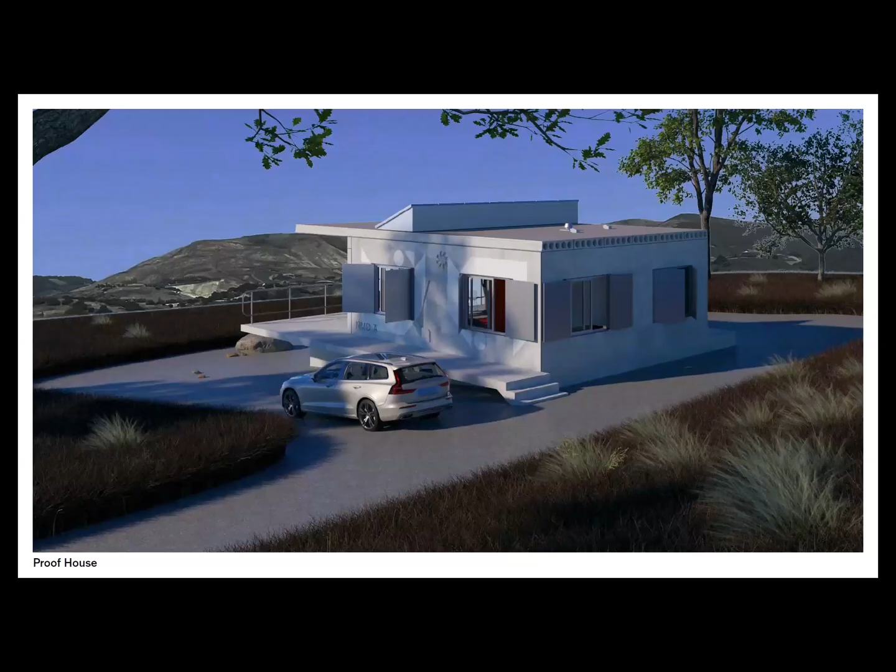There's the view—amazing view. It's a somewhat inhospitable site that has to be remade and rebuilt or cleared for the most part when we take the project on. The project I'll show you is the third scheme, and I'll show you an image of the first couple of schemes. It tells the story of this design relative to change, both internal change for me—not paradigmatically, but just in this one project—from X to Y.

A lot of this, of course, had to do with the conditions of not only the environmental response, but also conditions like money, budgets, timeframes, and that sort of thing. It's a concrete house, a precast concrete house. It's a very, very simple volume, and what you see is what you get in many ways.

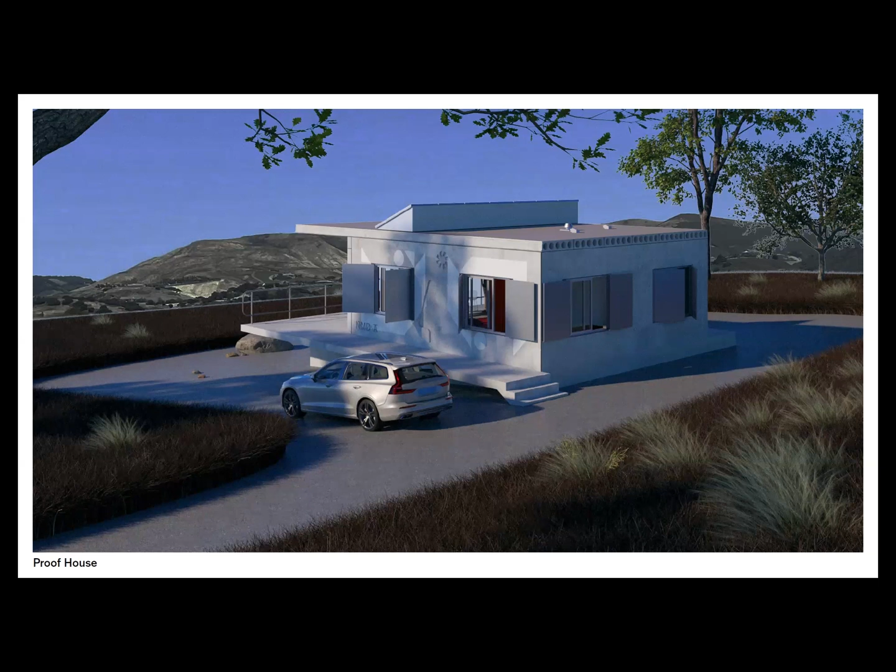There's a plan—we don't have a laser pointer, but it's nominally 24 feet square. It's slightly off square. You can see the dotted lines that go over the plan; those are 4 foot wide by 35 foot long precast concrete hollow core deck elements, which I didn't design. They're based on a factory element that gives you a scale of the project. So it's about a 10-foot cantilever on this roof.

Each one of the walls is an independent precast form with punched windows in it that are all the same. The project as a building is very, very much a response to finally discussions, even after a couple of years, of why do this project? We want to have a lifestyle that would engage in this. We have a certain amount of luxury to be able to do that. The conversation about doing this—because they're not so wealthy that they could buy a site on the coast and build a fancy house—in some ways speaks to California's question of wealth and status. They're certainly well-to-do, but not absurdly or obscenely so, shall we say.

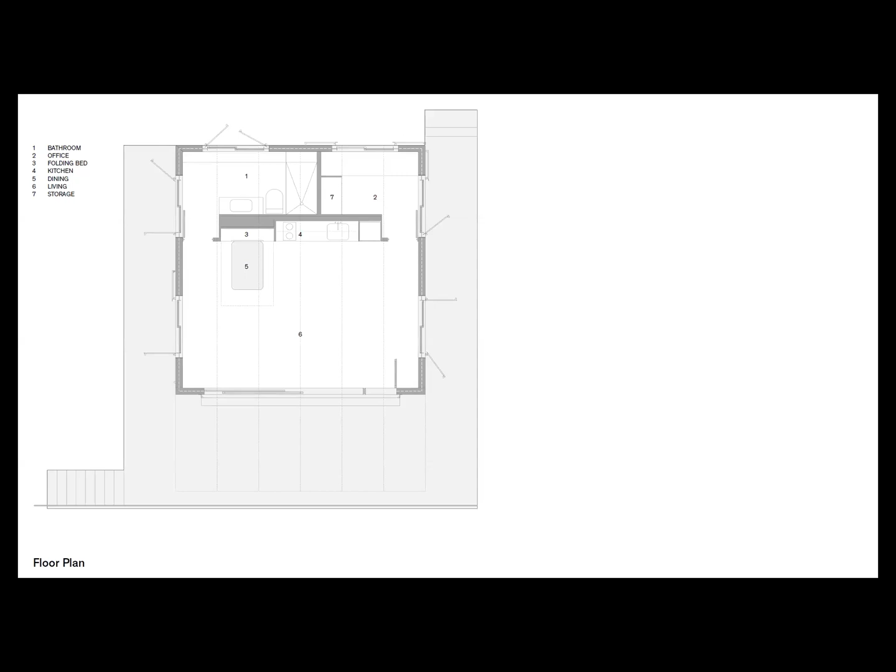Number 3 is the folding bed, so it's a Murphy bed. They fold up the dining table into it—a standard micro loft design element. The rest is just a space for them to hang out in, and the terrace around is for viewing, etc. You can also see the steel shutters on the windows.

Now, if I compare that project to this one—ooh, this one's cooler. Much cooler looking, more like me. If you examine the past 20 years of my work, you'd say, these are his colors, these are manipulations of his forms. And that one is not.

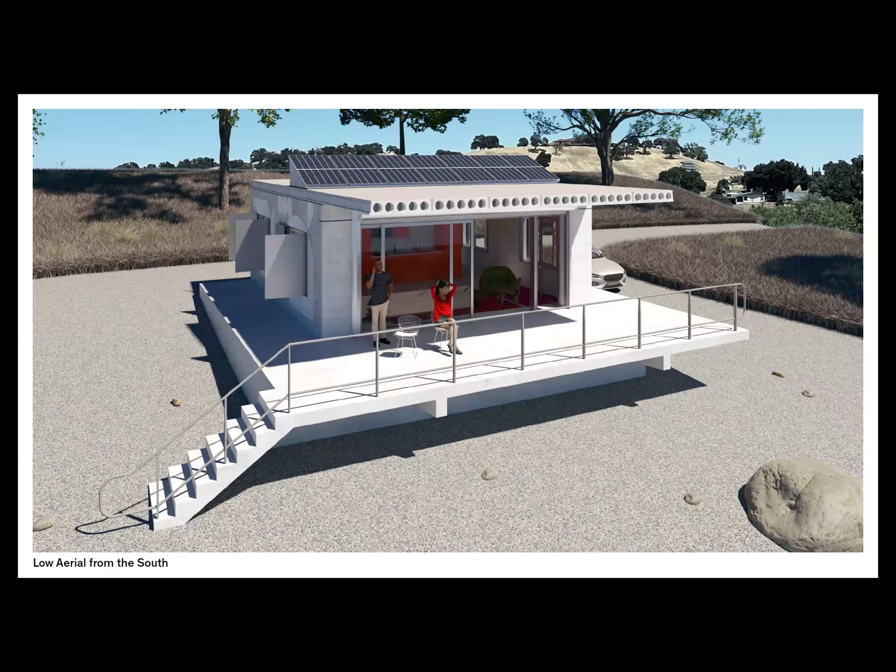Who did that? I don't know who did that. Now, I'm still of the generation where it matters who did what. That's either boomer ego or boomer ambition, or I haven't quite gotten to the part of selflessness.

But it's interesting—this one is a transition moment where I wanted a certain amount of exoticness in the precast system. It's an octagonal house. Doesn't really work as well.

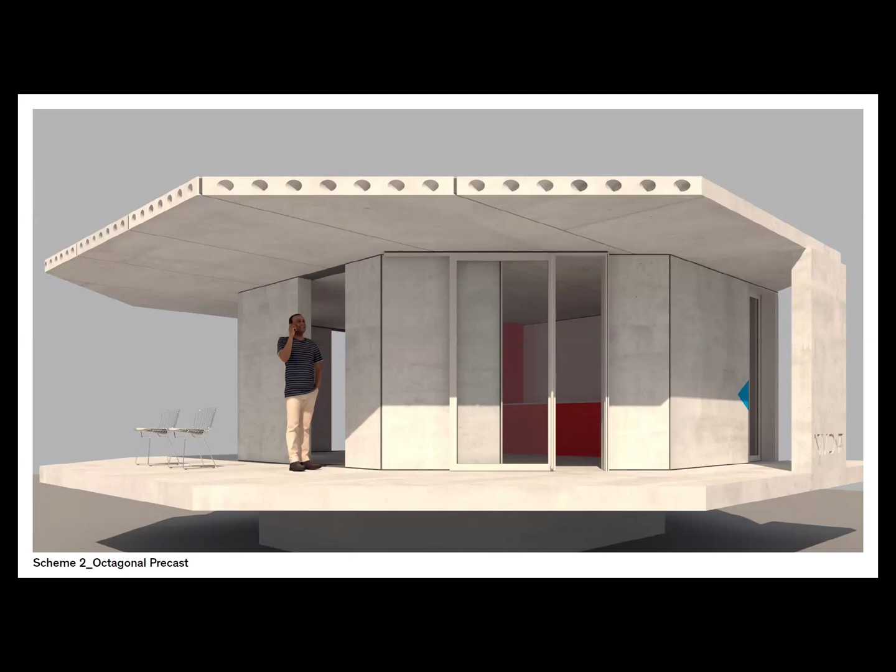Essentially, at the end, we transitioned from the first scheme into the proof house scheme, making it in precast concrete for fireproof capabilities. This became the ultimate and direct expression because it is affordable for them. It also speaks to the logic of construction that we want on the site, which is as little as possible.

So it is what you see is what you get, except that when you look at the elevations, these are just regular aluminum sliding windows, reasonably good size. These are silver painted steel shutters, because the burglar-proofing is: shut it, lock it, put the rolling door down, and walk away from it. It's coyote-proof, burglar-proof, et cetera.

And because they don't Airbnb it, you open them up. Along with the super graphics, which I'm responsible for, as well as the way in which shadows produce graphic design—that's why I love renderings like this that engage in shadow. There's an ideology about shadows in drawings.

I don't want them, or I want to diffuse them. I want to design with shadows. I want to paint with shadows, because A, they're real, but they're also incredibly vital.

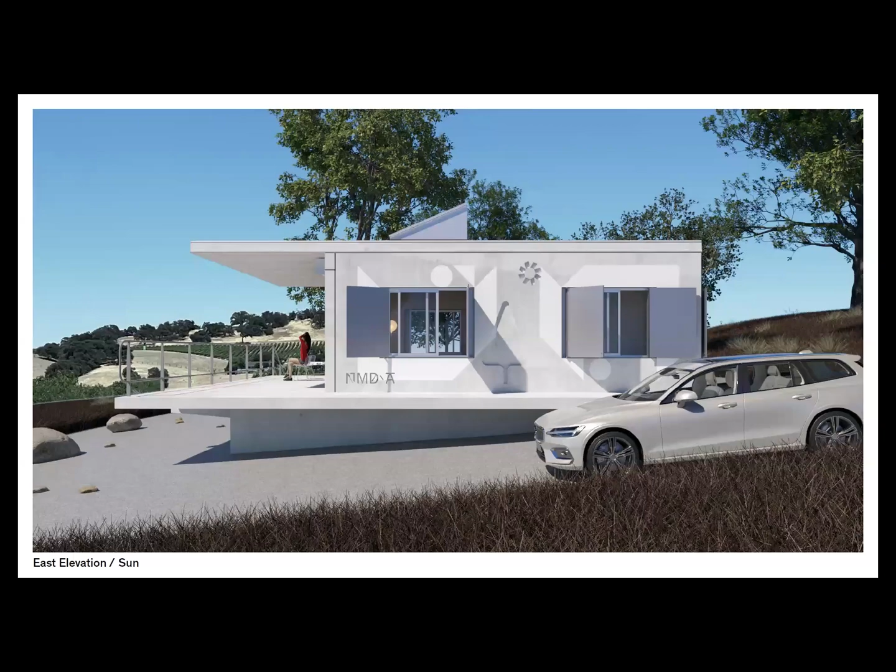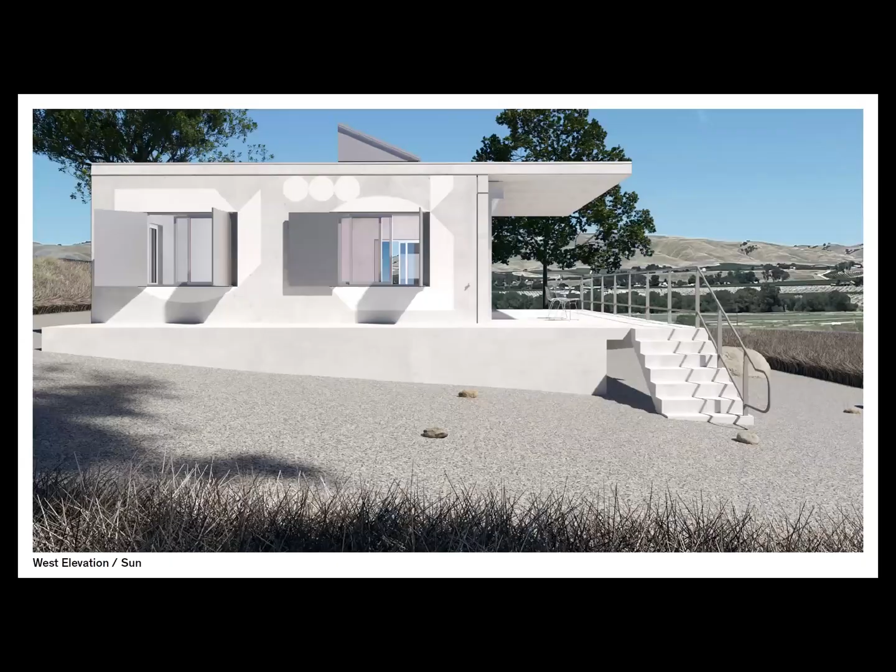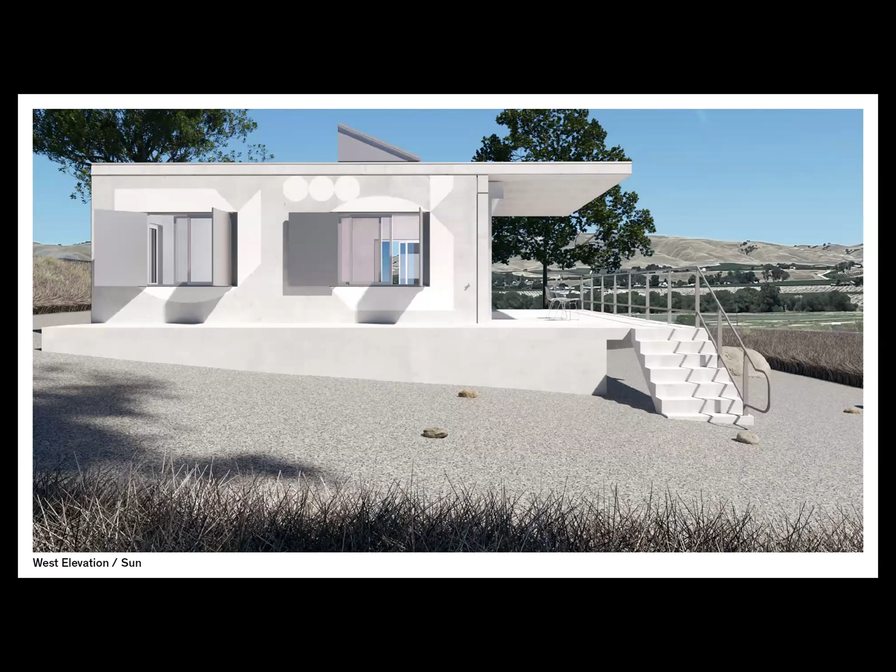There's not really much else to say, except that it's probably the highest level of engineering that needs to go into this, and also the resolution of all the components of making it resilient essentially gives it the design. Now, I've tweaked the way the shutters connect to the windows, and there are small details in there—of course the graphic design, et cetera—that bring a smaller, finer thumbprint into the project.

The other thing about renderings that I like to do is try to simulate as much of the real conditions that a building will enter into. That means having some skill at the rendering level. And the fog—maybe you've even seen it roll in in the morning—makes us ask questions about how the color qualities, contrast, et cetera, change in these different conditions.

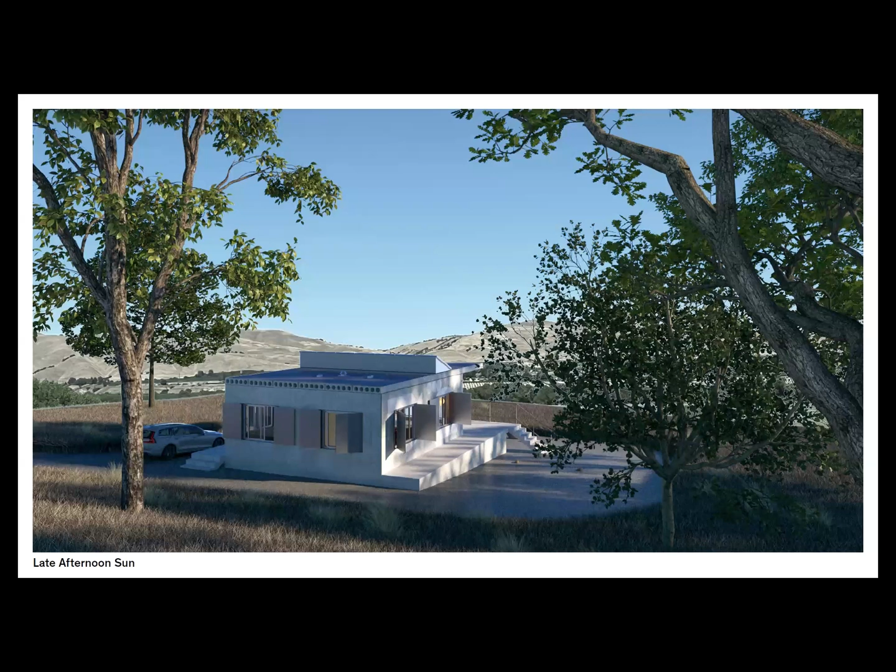Here you see that column is a cast-in-place column. Then it's a precast beam, not in sequence. There's one of the precast walls. The windows are brought in separately after they're on site.

And you can see the overhead door. You can pull that down, shut the shutters, lock it up, and walk away as if it was a kind of storage box.

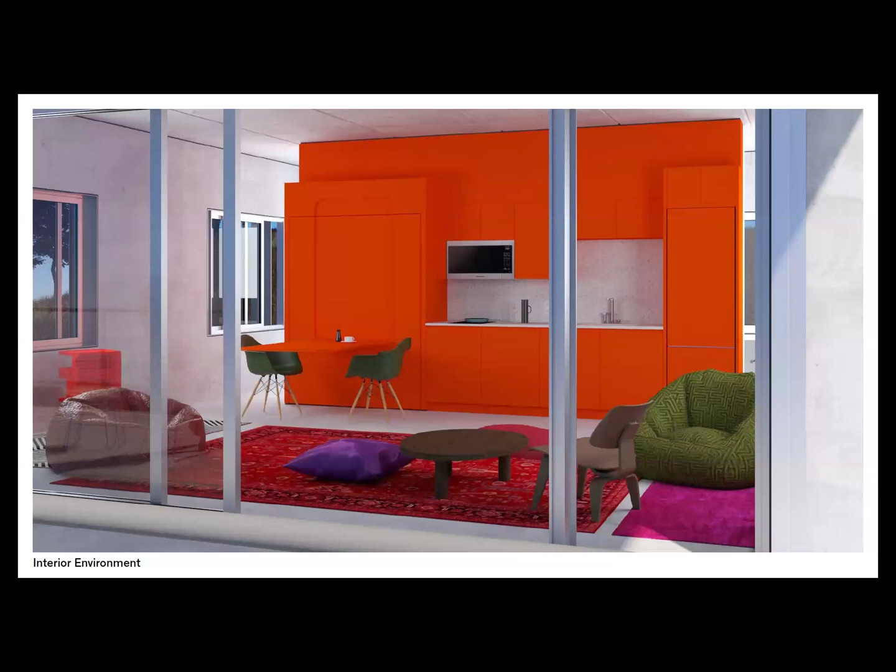Inside, it's a pretty Spartan environment, except we want to have a certain amount of vitality and color. This is a repeat client for me, and we've shared a lot of the same aesthetic values and agendas, which makes this quite fun. And the view outside.

Okay, this is the most recent completed project that my office has done. It was finished about six months ago. It's in Beverly Hills. It's a 30,000 square foot spec office building. A spec office building is a piece of real estate. A client comes to you and says, let's develop a site. You have the program, the budget, the zoning envelope, and a spec office building is you build the floor plate and then you seek out tenants. It's part of the economic machine.

The not-so-dirty secret is developers build cities, not artists, not politicians. There's only one stadium, there's only one city hall, there are only a few libraries. There are millions of office buildings, there are millions of housing projects, and they're all in our capitalist system based on return. I've engaged in that for a long time because I said I'd like to help build the city rather than sit on the sidelines and wait for singular sublime commissions. It's been both rewarding and challenging at the same time.

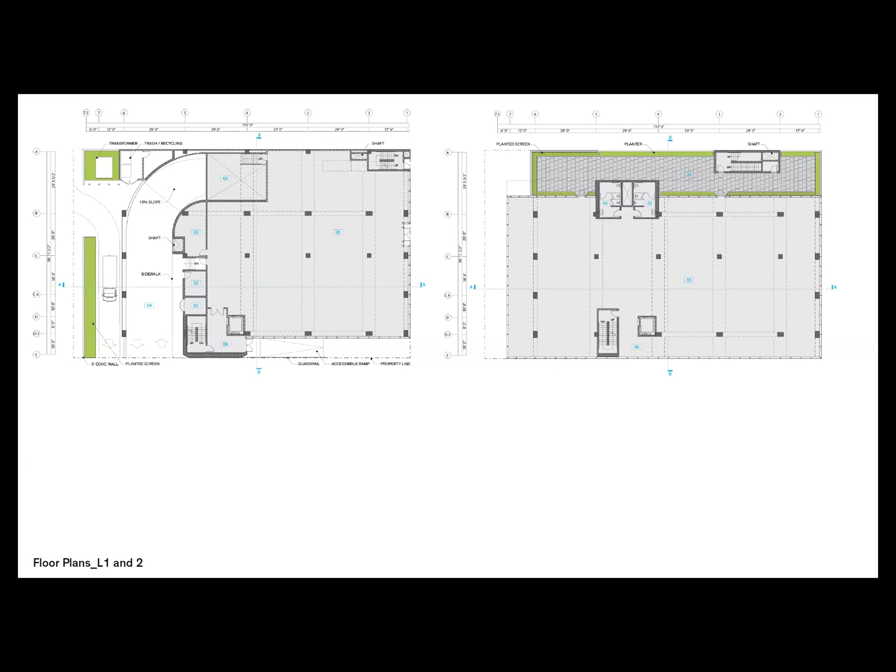There's access to the parking in the back off the side street. The lobby is incredibly minimal. All it is, is 2 stairs and a toilet core, and otherwise it's just an open piece of real estate.

Now, with an incredibly wide lens, we can make this kind of image. And you can see at some level, though I've painted the picture of it being an empty programmatic project, there's still something projected at a level of sensibility, at a level of impression.

In fact, if you do a building in the city, unlike an Atascadero, it's a public building. It's a public building to the extent that the public interfaces with it, even if you don't enter into it, even if you don't have business there, even if you don't own it.

These are some details. So the image on the left gives you a little bit of an example, actually both images, of what's going on. There's a 6-story storage building next door, and my job was to try to liberate, to move as much of the floor area of the building as possible away from the party wall, because obviously there's no light coming in to that point.

We are on a corner, there are 3 facades that are open, and so through some magic of shifting the area around, because we have a box that we have to work within, a zoning envelope, shifting it around so that we can get 10-foot cantilevers on the one hand and a 10-foot soffit for the entrance to be able to liberate the top 3 floors of the building away from the building next door.

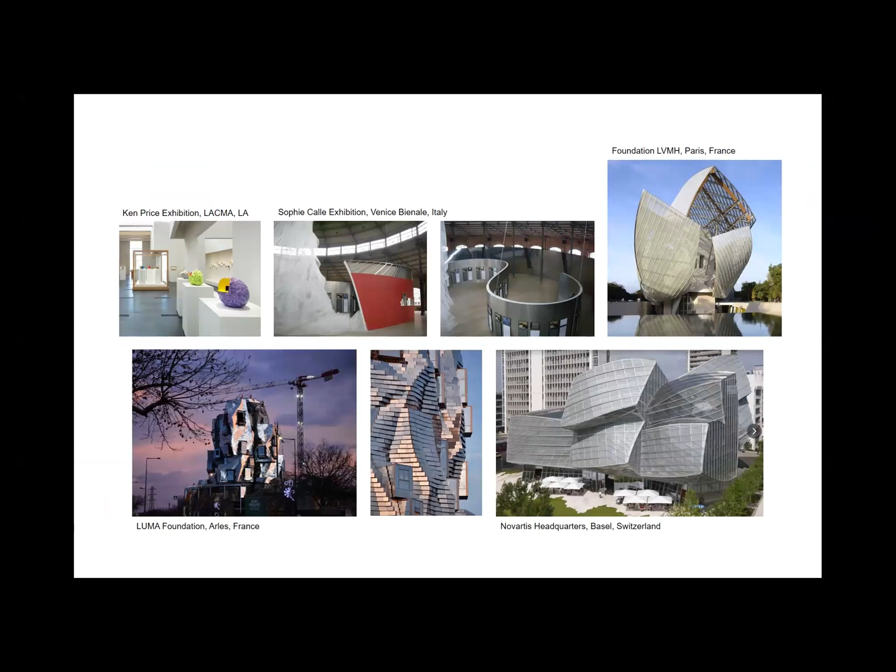I started the office back in 2012 after a stint of 8.5, almost 9 years working at Frank Gehry Partners. While the practice represents my own unique perspective and the perspective of the team working on the practice with me, I've certainly brought lots of interests, curiosities, experiences, and expertise from previous professional experiences and interests cultivated on my own.

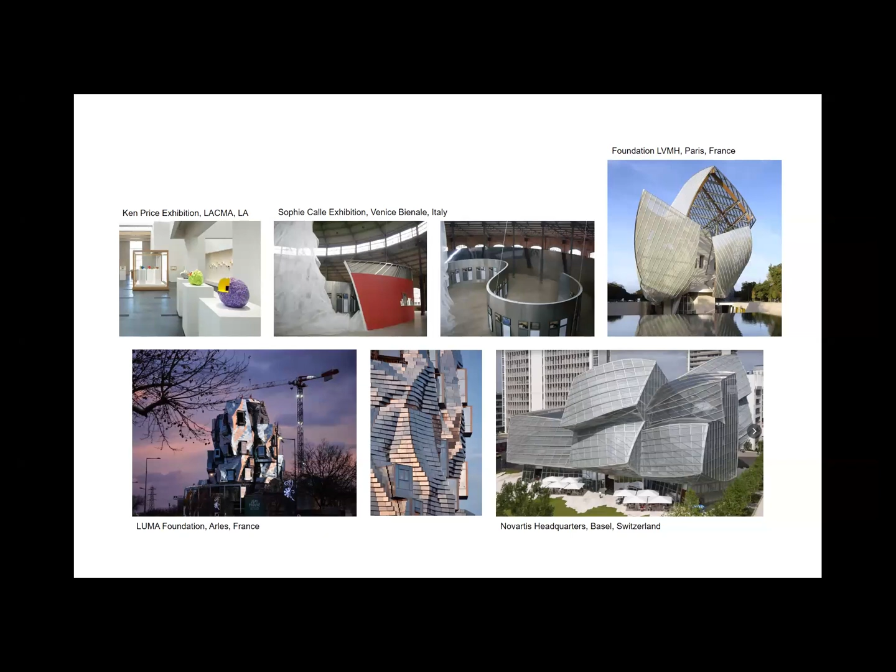These images are referencing the work I contributed to at Frank Gehry Partners. These projects are never explicitly referenced in the final output of the work we produce at MN Office, but they often serve as touchstones and day-to-day fellow travelers. We look back at them to make sense of some of the work we do.

I think that's important to acknowledge, because we often think design interventions come out of thin air, and sometimes they do. But in my experience practicing and observing others I admire, that's not typically the case. There are often threads that reemerge or are cultivated at different instances of a professional life throughout different opportunities.

I wanted to put this out there as background to what I'll be talking about. I also have to acknowledge the work of artists and art movements, which are impactful for me. I think they're different things for different people—some delve into histories or sciences or other influential lines of thinking, philosophy, as Neil was mentioning.

These practices and works have been a long-time influence on me and on how we've been thinking about the work. I hope to tie that into some of the things I'll show. The names of these artists are loosely grouped together as the Light and Space movement, which developed here in Southern California. That's an important thing for me.

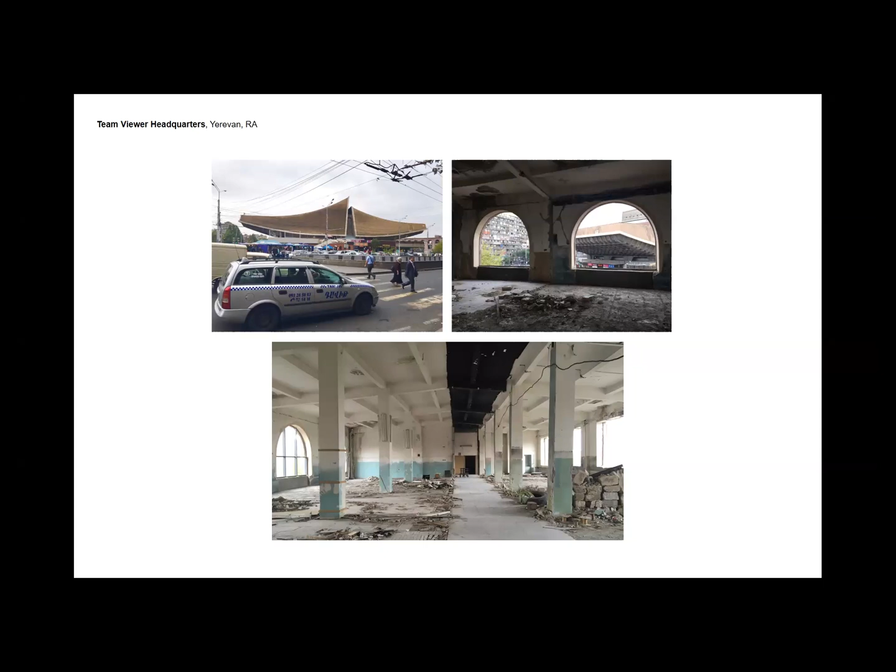The first project I wanted to share, realized quite a few years ago, but a good one to thread the past and what came after, was the headquarters for TeamViewer in Yerevan, Armenia—an institutional commission. It was located in a largely idle Soviet-era factory in the heart of Yerevan. Although very dilapidated, this building was designated as a historical monument, and was a full-on fabrication factory before the Soviet Union fell.

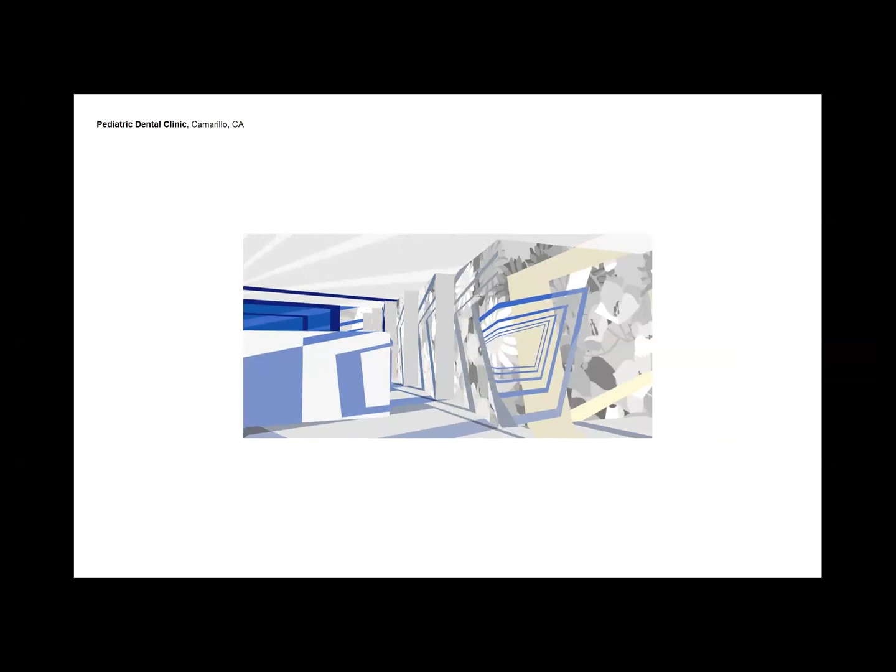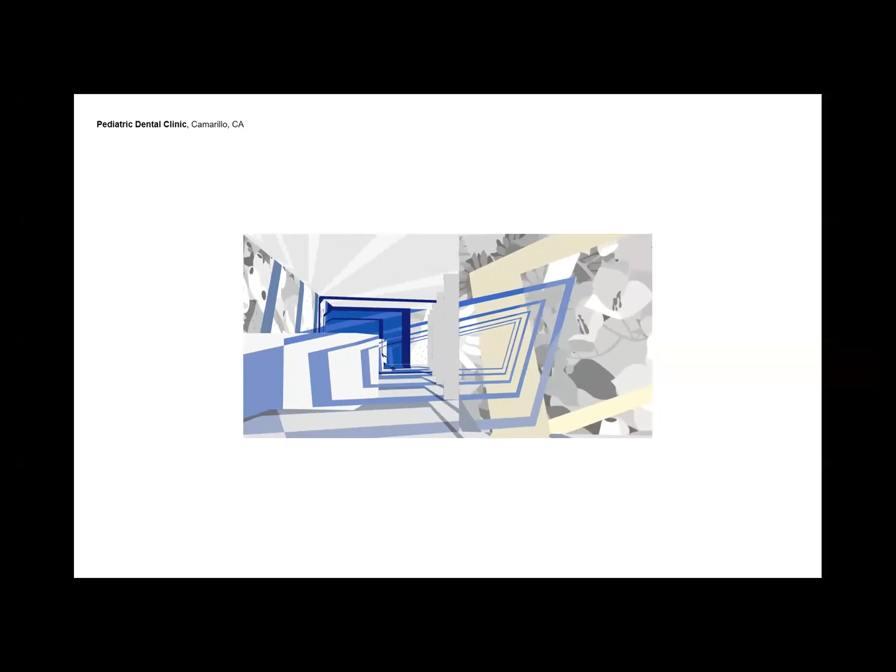Again, with the videos we're trying to simulate how we would make all the layers we're designing—the illustrated graphic, the various layers of vinyl, flooring, carpet, lighting, wall build out—all snap into focus by animating these 3D moments. It uses anamorphic projections as well as illustration upon a series of lenticular surfaces, the step surfaces, to create layers of visual interest to engage with, and for key programmatic functions to organize themselves through.

Jumping back to a project we did a number of years before this, it was a proposal for a gateway in Little Armenia. We were invited to do this proposal. It was a finalist; we did not get it. You will not see this proposal built. You'll not see this as a gateway.

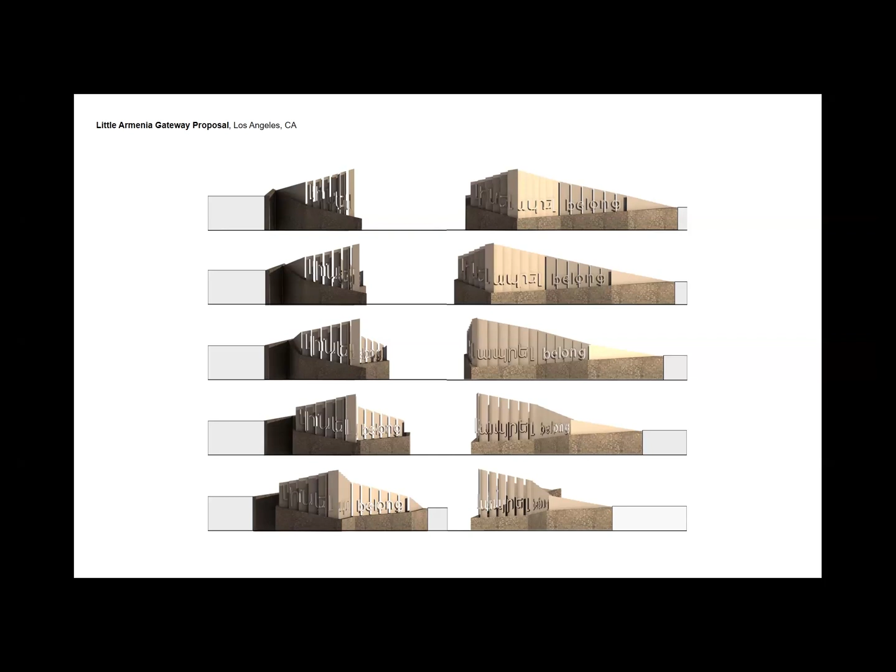But this project, I think, was the first time we started working with a lenticular surface, and that theme reemerges and scales and skews quite a bit in our work. A lenticular surface can be a way to control an optical illusion or optical perception when done in photography or image production, but at the scale of architecture or environments, it can also start to shape what one sees and experiences, or time when one sees and experiences said environments.

So back to Sugarbug, the dental clinic. I think the efficacy of that lenticular surface in handling all the programmatic complexities of the project was one of the key threads for us to jump ahead on. We actually started thickening it and programming it, filling it in with some of the operations bays and dental visitation bays.

As you see in this diptych, the geometry of the irregular stripes took cues from the ships in World War I that were camouflaged in order to make their distance not easily visible to the enemy. So we started taking the stripes and camouflaging the space, so that once you're walking in the main area, the distance between an operatory bay and where the public gets to walk becomes obfuscated through the graphic.

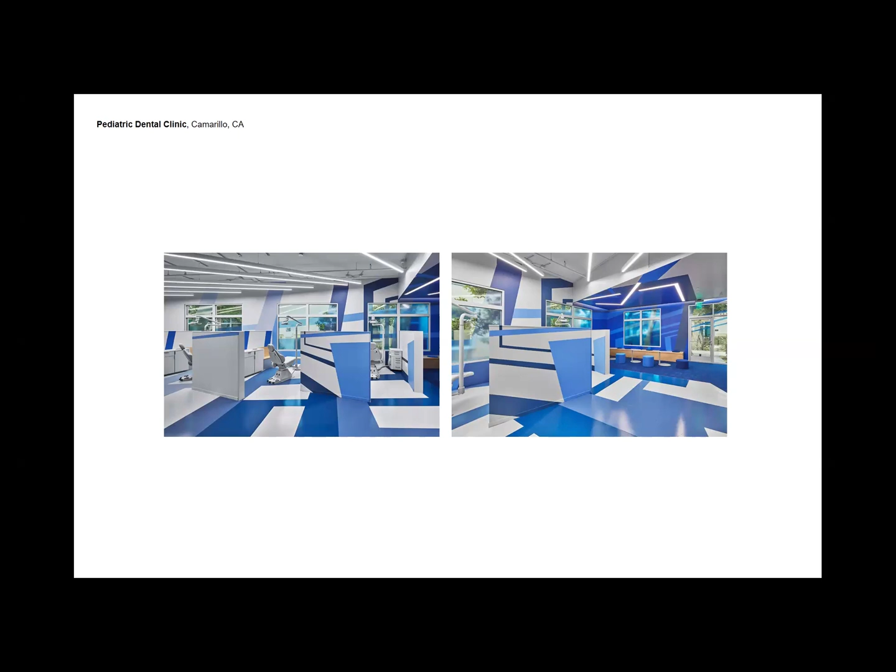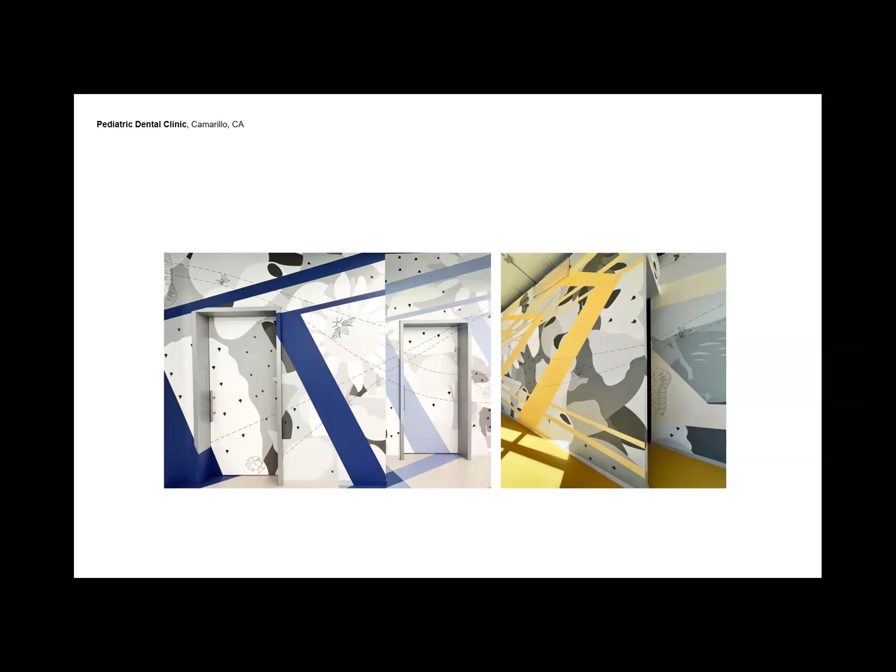The illustrated layers of the local flora and fauna brought the project back into the time and place, against these more abstract lines that were doing the work of certain spatial configurations. The colors and tones were programmatic wayfinding indicators, as well as a kind of brand identity starting to emerge for this particular business.

We make really intense drawings that project all of this work back into them, because the drawings, like a Sol LeWitt who made his artworks through direction, become the kind of direction for how these things get installed through various trades.

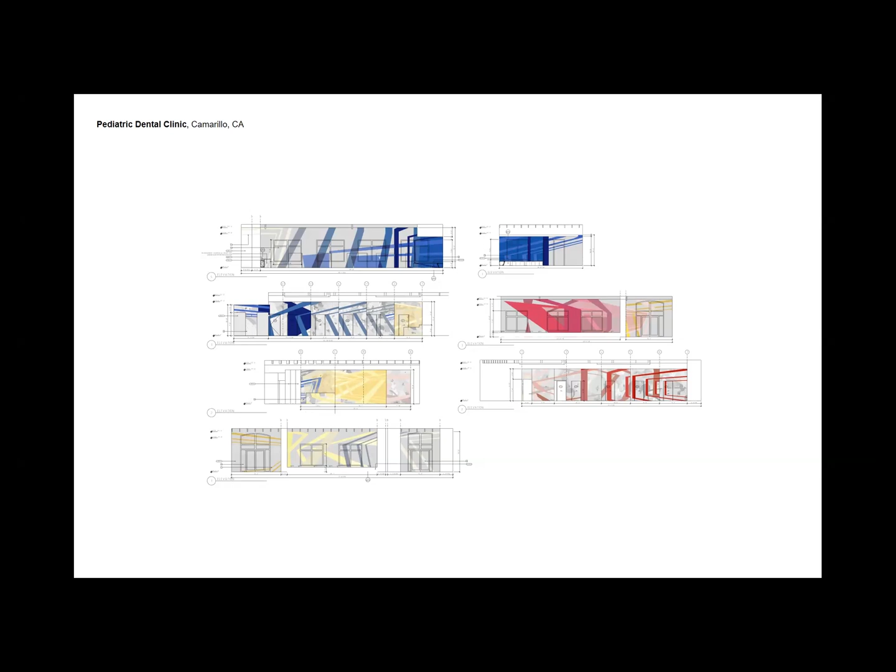So these are some examples of that—the model becomes the lead in designing and communicating, but then that digital model also flattens into drawings that become construction directions.

So the project intention culminates as formal operations that, when commingled, transposed, and translated, have the unique potential to transform a spatial condition that would otherwise be hermetic and potentially not so inviting to its younger constituents.

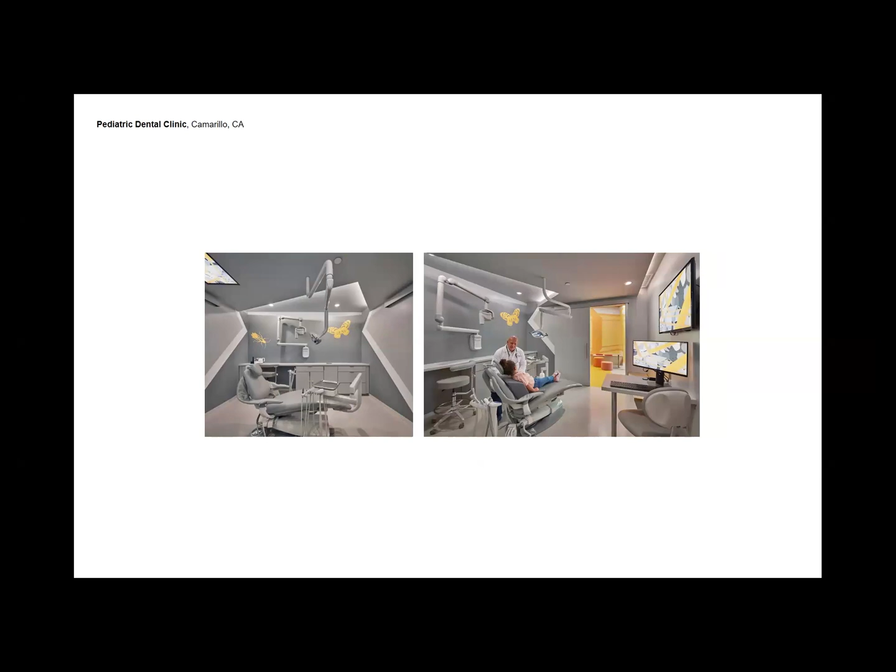And these are the interior spaces which start to differ as an internal environment than that exterior, much more exuberant zone.

Jumping to a current project we're working on, very much in process—our proposal for this adaptive reuse of a neoclassical building in Yerevan. This project takes the work we've been doing with imagery, graphic, and projection.

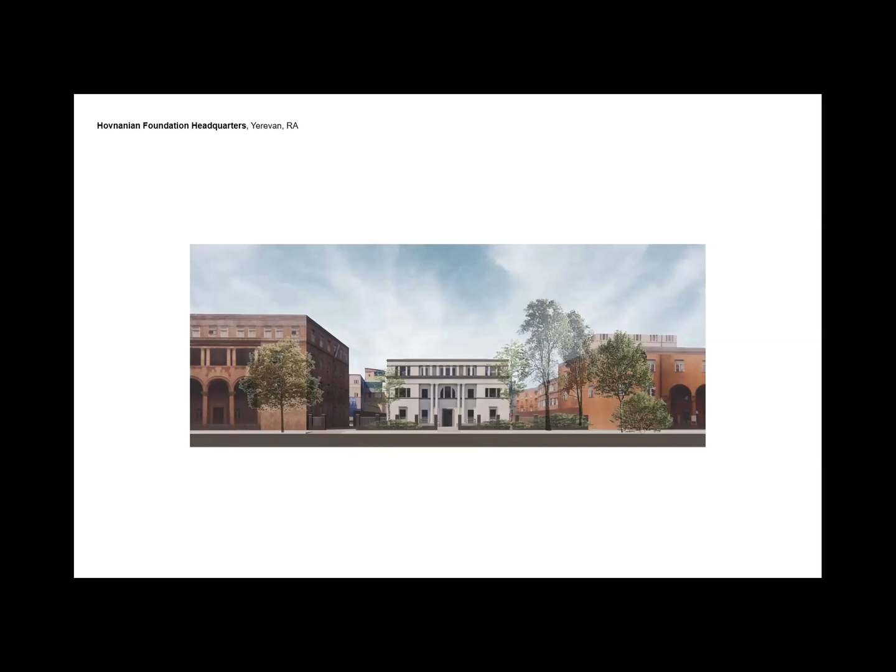And brings that work we've contained into an interior environment to contend with a very overt exterior environment, with lots of historic monuments around and very keen opinions on what should and should not get built. So the perception of the existing needed to be recreated and reimagined.

After decades of anachronistic alterations, while stretching the imagination of what might be, toward a kind of holistic, singular reading.

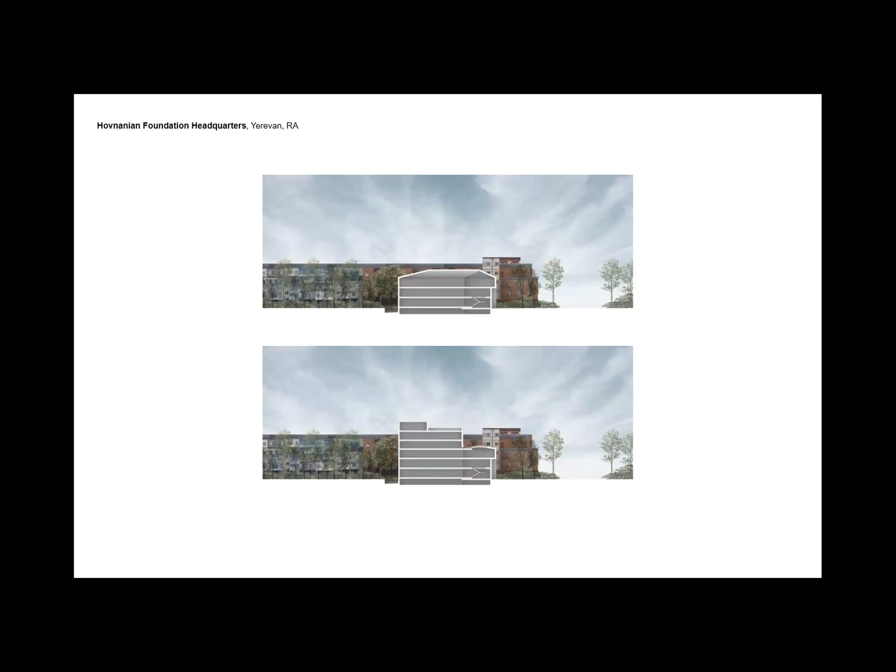So the program steps back. We're actually trying to manage the massing moves to be quite respectful and reflective of all the historical codes, and then in turn being quite suggestive and forward with the graphics—the moments of the project that are just paint.

We keep saying it's just paint. And it is just paint, for now.

And the historical tradition of constructing through tufa, which is a local building material there, and how tones of tufa are bracketed to appear as a kind of larger tonal image.

This has gone to very extreme ends, as we typically do iterate quite a bit, as well as projecting some cultural imagery to develop palettes that might have a place in having a conversation with the original elevation of this neoclassical building.

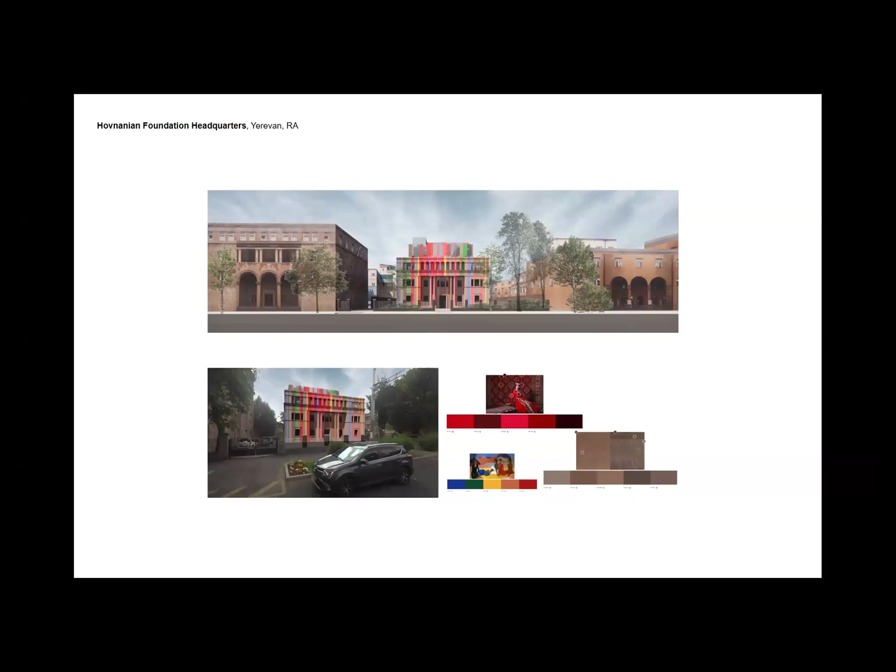So in some cases it's gotten very exuberant. These are not our favorites, but the clients have become invested now as well. And I think this is the point we've landed at.

At this point we've settled on the projected color scheme as a tonal effect, bridging between the context, as you see, of the site.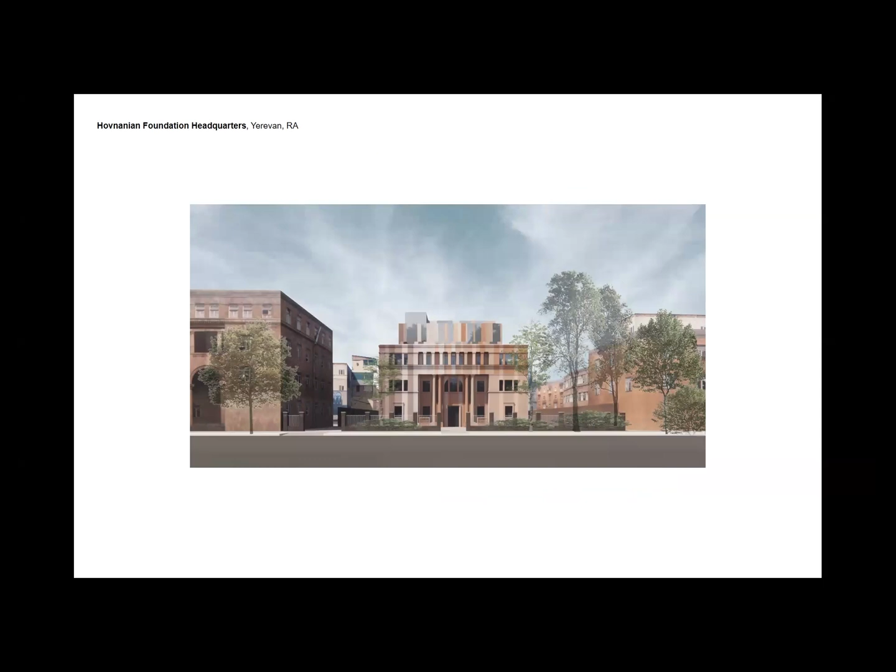Hopefully this is the kind of conversation we can continue to have, which is what we as a group are interested in. We're not interested in it being an outlandish or exuberant building—we're more interested in it being thoughtful, with the adaptive reuse having a notable character to it.

Last couple of projects I'll show. This is a competition proposal that we were invited to participate in.

It's a large rural site that houses a kind of smart campus for after-school as well as summer programs for students of all ages. And this competition—

This site boasts very strategic views of some incredibly important landmarks to Armenia and the culture: Mount Ararat, Aragats—these mountains are iconically very important.

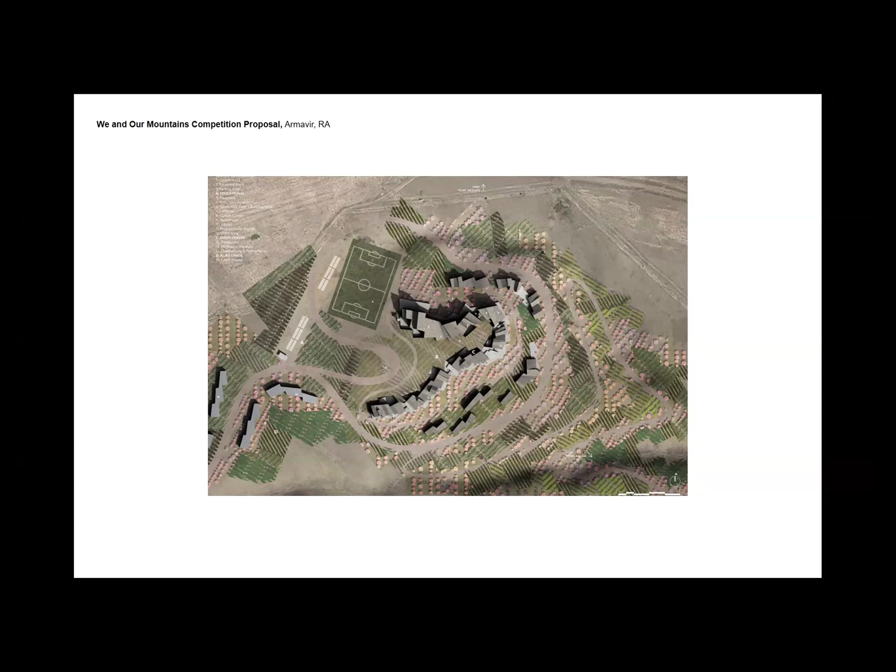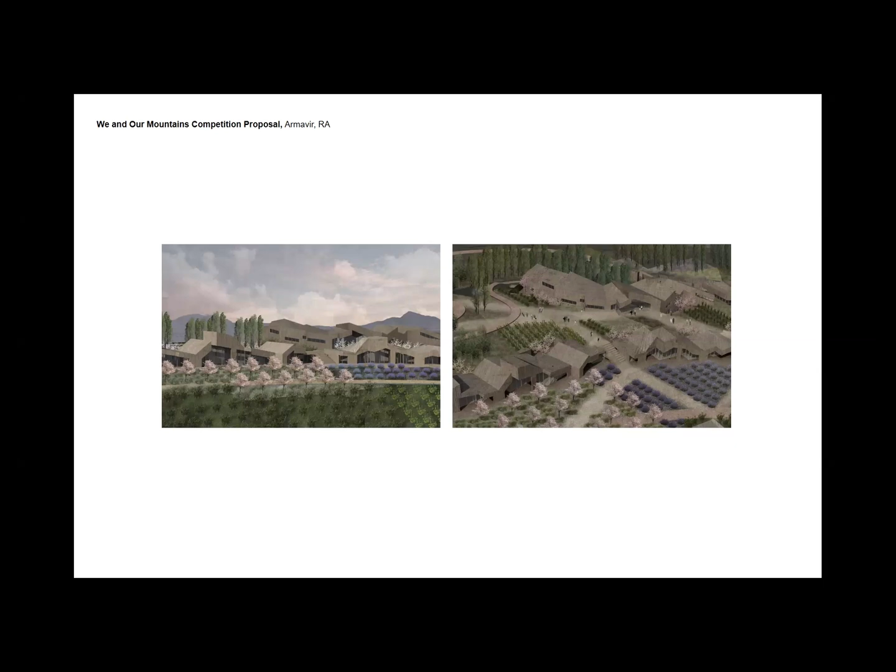I think here this was an opportunity for the work we've been doing, thinking about flatness and depth, and how to use image to project back into a kind of depth of objecthood. This was a good, speculative moment for us to experiment with that and think about it a bit.

So I think that was the pivotal thing this competition served for us. We did not win it, even though we got invited to compete in the sister competition.

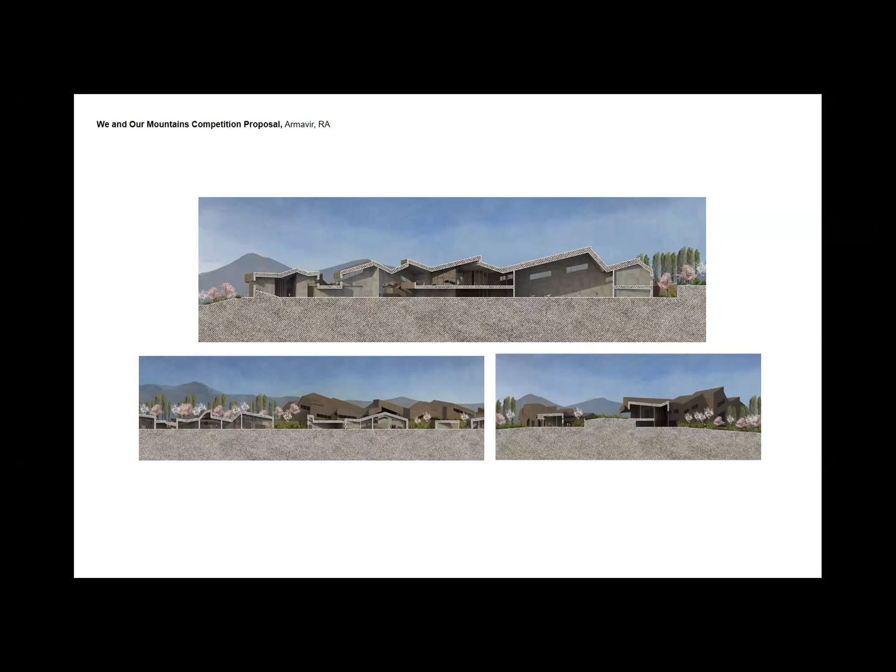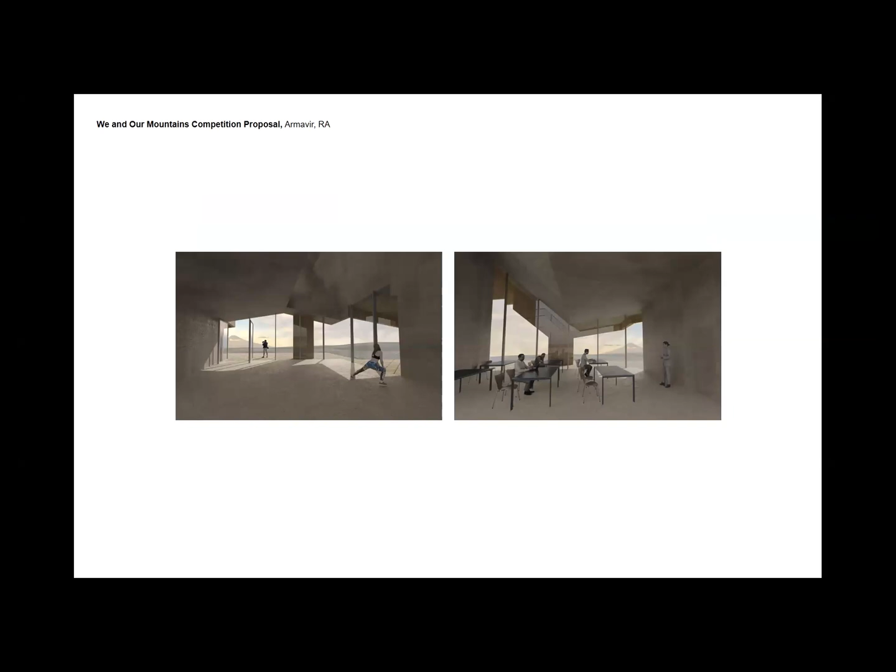These are some sections that talk about the ambition of the project as a continuous space housed under the roof line, and the view looking out to those iconic mountains, framed through these varied apertures. Our hope was that we made the case for this complex being a mechanism that could frame a different gaze towards the future, not merely the gaze of looking at these mountains through the lens of history.

All right, last two—scalar shift. For us, these smaller projects, in particular this one, which is a duplex, an SB9 duplex in Hollywood, have an existing home at the top of the through lot, and this is the proposition for a duplex at the bottom of the through lot.

It contains, or explores, some of the more expansive interests that I talked about, but in a much more compartmentalized site.

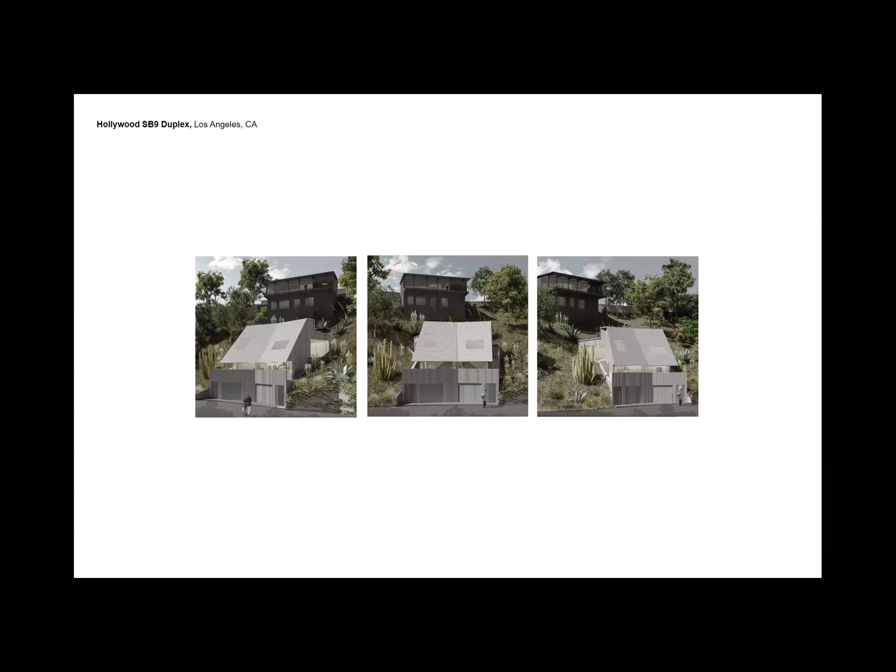It considers the shaping of this mass, which you're seeing the rooftop, with the goal to obfuscate it from the home above, which is why you're only seeing the projection of the skylight. From the bottom, as you're looking onto it, it houses a series of apertures that try to capture different fragments of the dramatic hillside and the landscape of the site.

Going back to an earlier exhibition design—maybe a side note here—starting out in the office, when commissions were hard to come by, we did a lot of exhibition work, and we took that seriously to explore a range of formal and functional material interests. I think it's been nice and gratifying to have that come back and make some connections to the work we're now getting.

This exhibition project was designed through a series of strategic diorama boxes that displayed a historical postcard collection. The postcards were not physically displayed, but there were scans and overlays of these postcards displayed in the diorama boxes, and they were backlit.

The shaping of these diorama boxes reinforced the various perspectives we were picking up from the postcards—essentially making an object, a space, or an environment for that flattened image to come alive. In this project, we were trying to do the same thing with the stitching of various apertures.

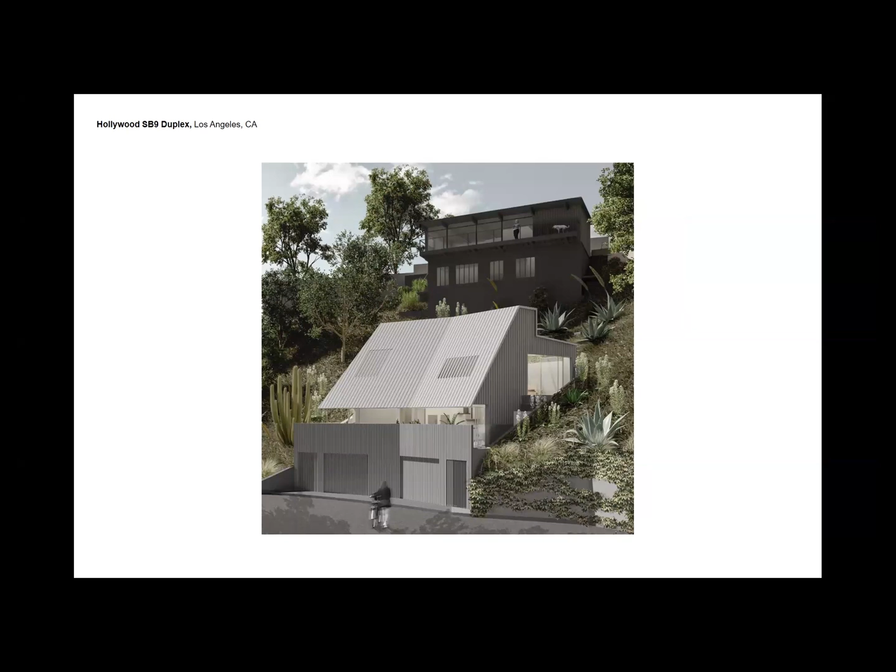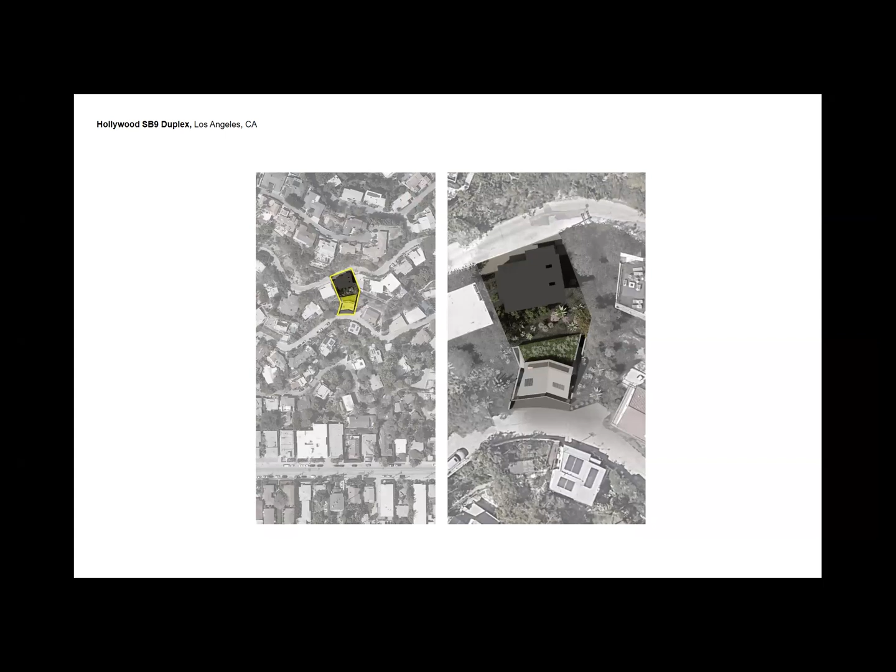The largest of the apertures, a series of horizontal sliding doors, revealed the main view to the Griffith Observatory across the way, while the narrow horizontal slits high up act as a more contemporary clerestory, sometimes very oddly and in close-up view focusing on the hillside, the dirt, ground cover, trees, and then a long operable skylight at the highest point, tapered to capture views of the sky.

This efficiently stacked plan makes compounded views possible—being able to see through the skylight, then have it fold across the corner and see the hillside or a patch of dirt—made possible because the plan is so compact and so sectional.

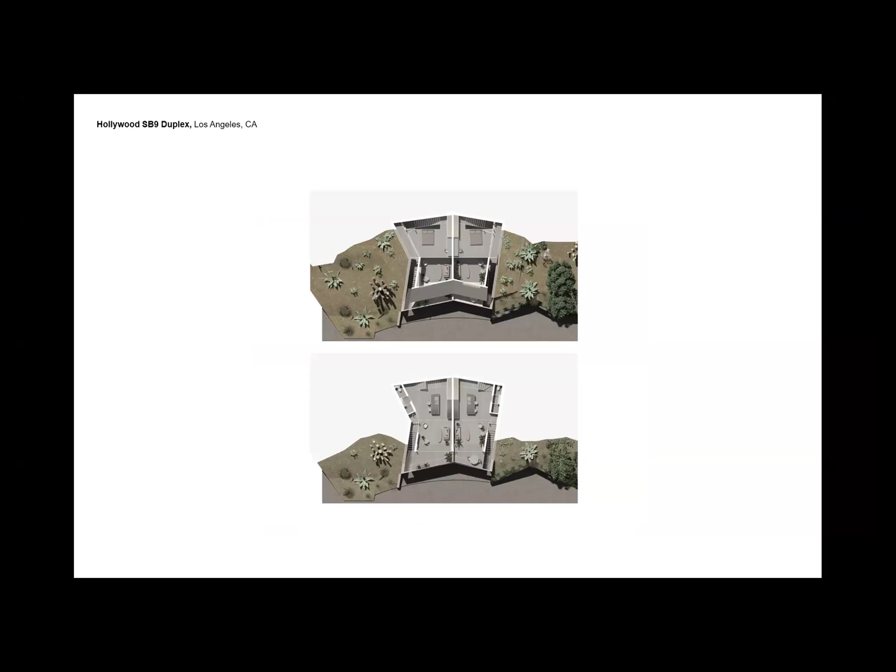And in this way, the views that are captured are sort of pieces of the whole picture and must be placed back together by the inhabitants of the duplex.

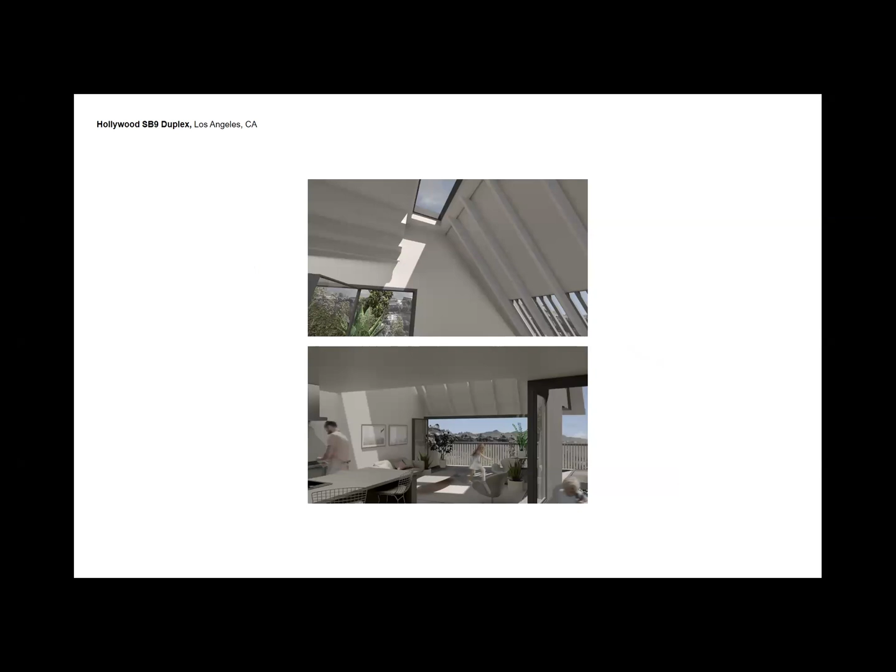All right, last project. This is the project we just broke ground on, in the wine region in Armenia—a co-op winery. It houses production but also has a small hospitality wing that will serve and sell wine as well. It's located in a bucolic setting in the mountains of that local region.

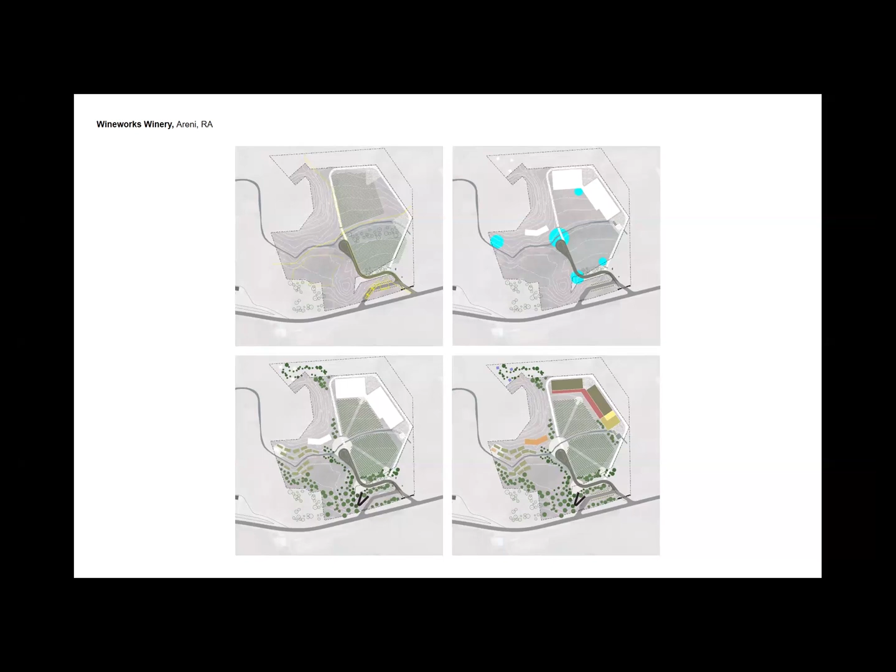Our proposal builds on the interests I've talked about in the office, navigating between perception, spatial manifestation into spatial design, and the function of the image as a kind of viewing apparatus, with constraints of the agricultural industry embedded in this particular site, and also a constraint that this would be a pre-engineered and somewhat prefabricated building, not entirely.

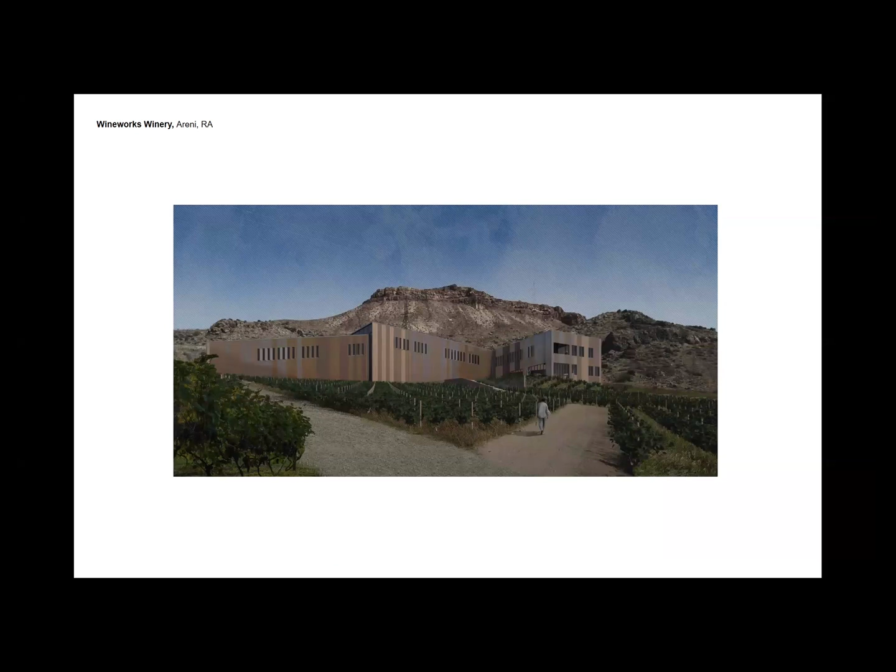So the subtle shaping of the mass and its relationship to the material specifications of the wrapper is instrumental, as it manages the external reading of the building through graphic and tonal cues from surrounding geological features. These apertures are also key, as they provide a contrary reading from the exterior and indicate breaks in scale to this monolithic skin that wraps.

As I mentioned, this project is conceived as a pre-engineered building, meaning we were asked to work within a very strict framework of possibilities—a kit of parts. The advantages of a pre-engineered building entail keeping costs down; production is streamlined, assembly is more facile. The disadvantages often mean sacrificing design.

In a nutshell: repetition—a repetition of the basic kit of parts; a particular layering of secondary elements, such that you can't make apertures everywhere or organize a free plan as you wish, you have to work within the rules of primary and secondary members; and then specific connections that get detailed and prefabbed in a factory before they're shipped out and assembled.

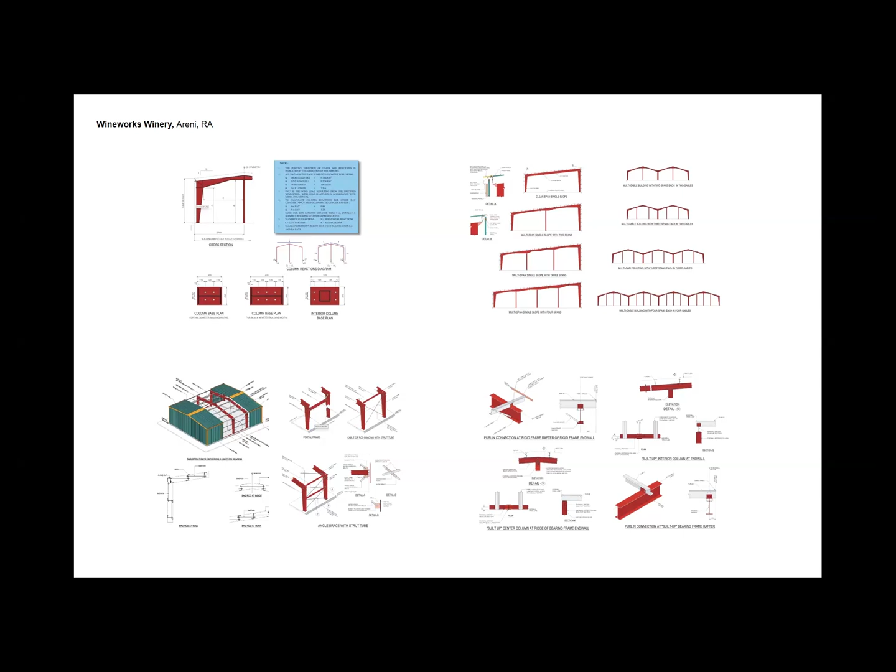I think when we think of pre-engineered buildings, we think of things that are very serial, the utmost example of efficiency. We were trying to maintain efficiency, maybe sacrifice a certain amount of it, and strike a balance between making this a pre-engineered building while still having particular design elements that would cater to the site as well as the functions we were asked to accommodate.

So we've been working through a BIM model with the factory, because all of these steel members are managed through digital means. If we can build a very detailed model, we can have a fluid exchange with the factory, and that's the only way to accomplish a more specific design in the face of their specialty being generic.

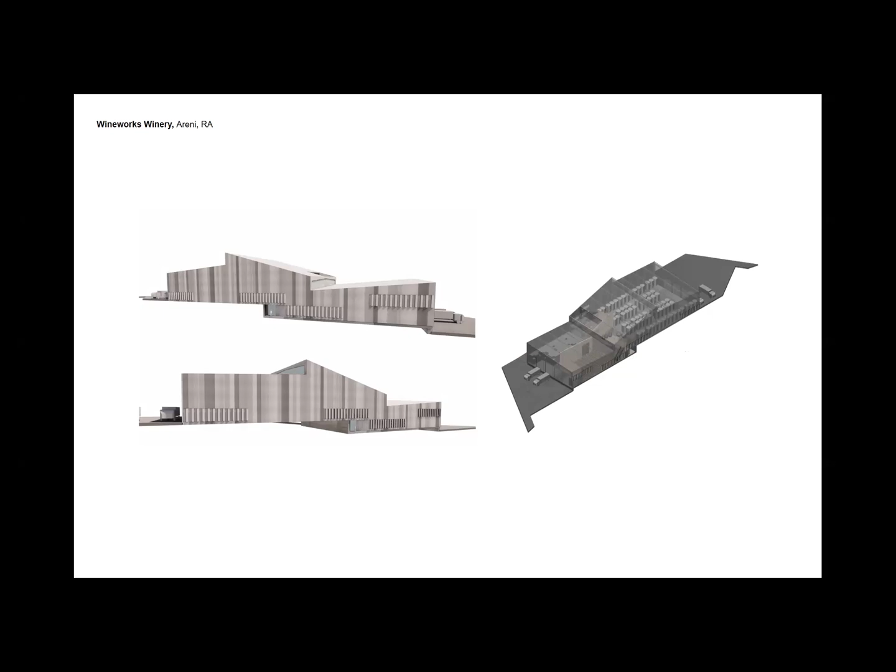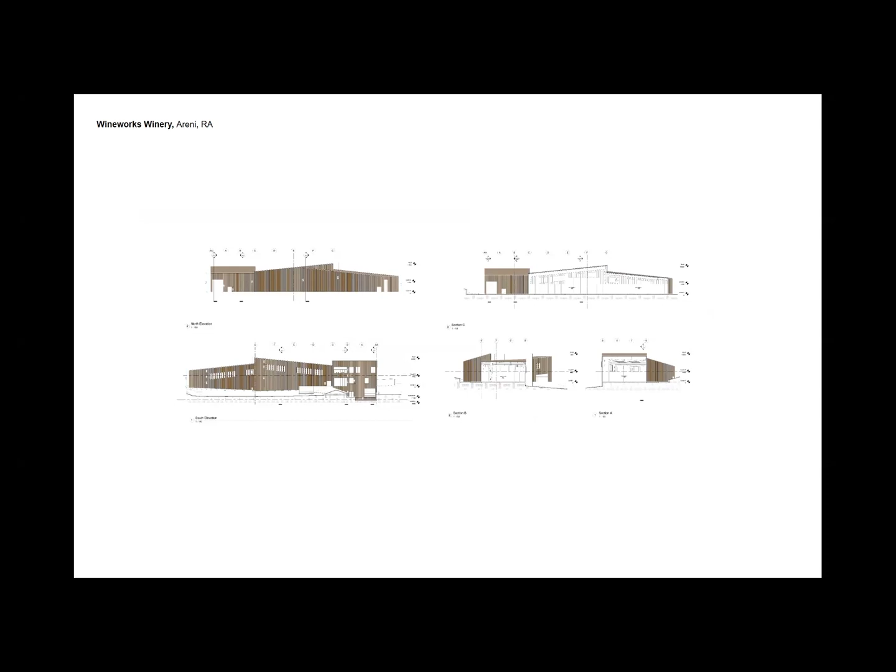We've also gone back and forth through the digital, through drawings made from the digital model. These drawings are coded specifically to manage the design criteria we were given and to exert our will for the wrapper, hopefully being a kind of paint-by-numbers guide for the installation.

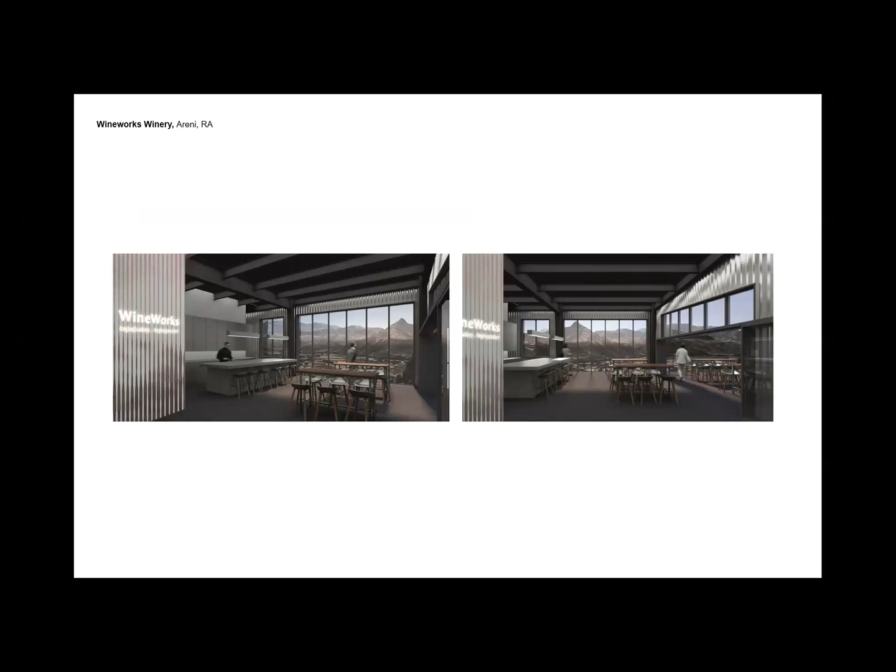We've produced our slew of serial imagery, which we use to see if we are making decisions about openings and framing views in the way that I'm talking about.

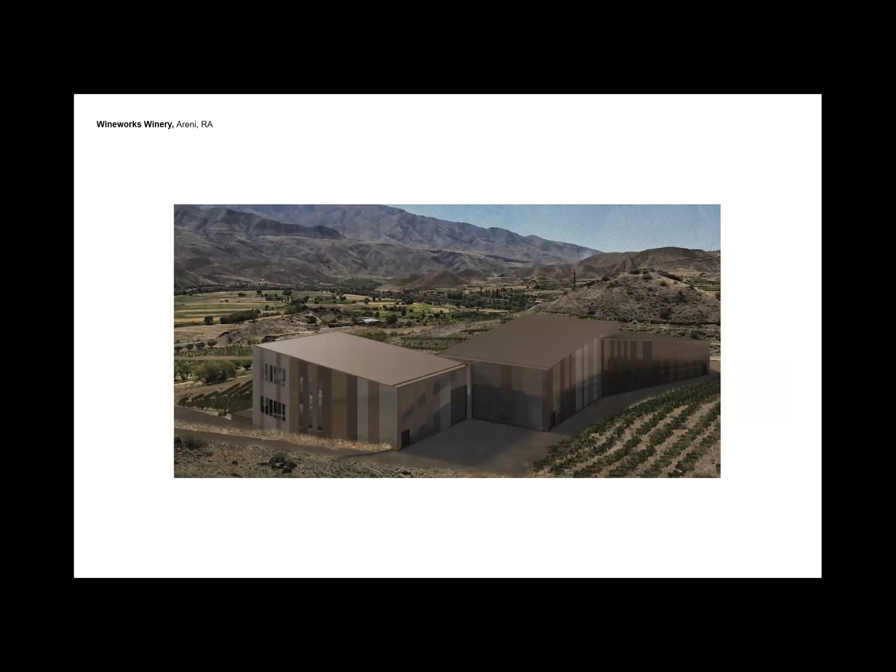And what we ended up with is what Robert Venturi might call a decorated shed—it takes on the dual identity of being a wine production facility as well as a hospitality wing. Coming full circle for this talk, I guess I could say it proposes to be an object that straddles the landscape—at times sprawling to meet the horizon as a series of continuous objects, arraying into a series of staccatoed objects, or collecting into one singular one, which is, I think, a kind of mid-range study into this obsession we've had with flatness and depth.